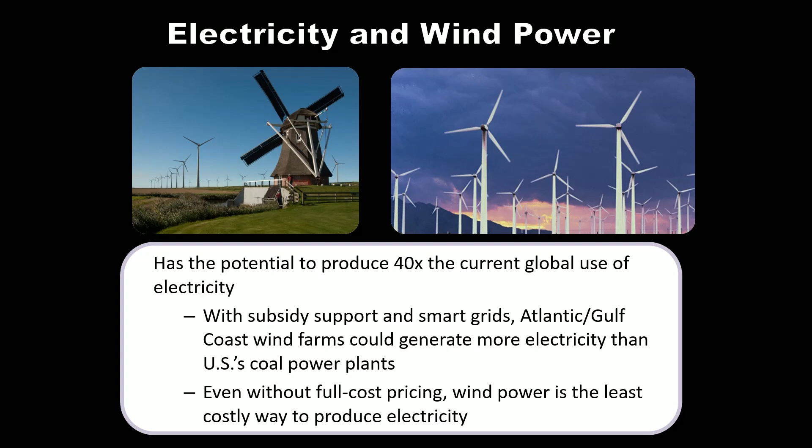Wind power relies on turbines. If during the first video where I was talking about electrical induction you were only half paying attention, maybe it's a good time to go back and check it out, where you have a coil of wire in a magnetic field. Anything that can spin that coil will generate an electric current. And what's going to spin that coil here is the wind. We're going to get the power from the windmill blades.

And the fact that you have this big wheel attached to the smaller wheel means that for every partial turn of the windmill blades, you get a full turn of the smaller wheel, right? Every time this big wheel takes one big turn, you're going to get several spins of that smaller wheel. As a result, as the windmill blades are spinning, the generator is going to be turning many, many times faster. You're going to get a lot of electric current even though the windmill blades are only moving so fast.

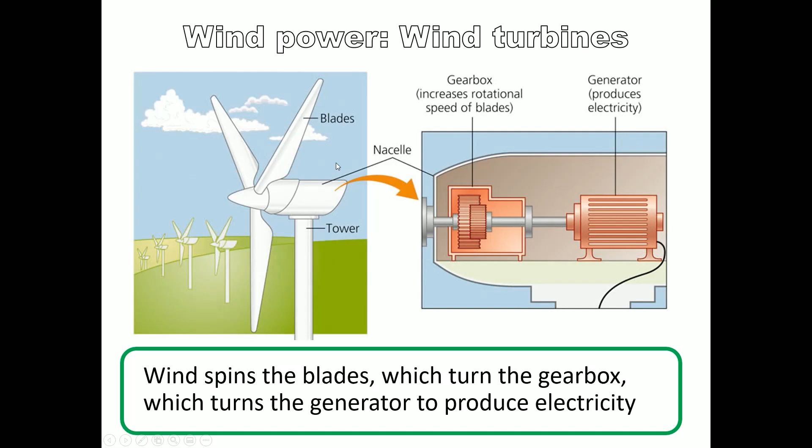Generating capacity, which is more than any other renewable source, and they are also the fastest growing renewable. Solar's fast, but wind is fastest. Now, like a lot of the statistics in my slides, this one is a couple of years old, not that old, just a couple. Of the 200 gigawatts of electrical generating capacity that the United States has added since 2007, 1/3 of that capacity came from wind farms. So when I say it's a fast-growing energy sector, it is really fast. This is one of the largest growing energy sectors that we have.

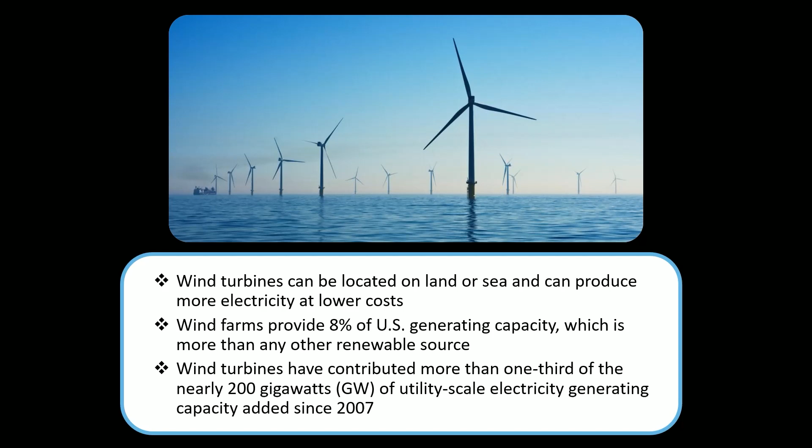And just like with nuclear and solar, where I was talking about new technologies that could improve it in the future, there's some new ideas that could make wind turbines even more efficient. So this gentleman right here is a marine biologist by the name of Frank Fish. That's right, he's a marine biologist, but he is called Fish. And he teaches at West Chester University, actually. He was my zoology professor. And he developed a kind of windmill blade that has these tubercles on it. He based it on a whale's flipper.

He had studied the hydrodynamics of how whales swim through the water, and he realized that these tubercles reduce drag as the whale is moving through the water. And he thought, hey, wouldn't that be a cool thing to adapt onto a windmill blade? So he tried it, and it made the windmills way more efficient. So you get similar energy outputs with these windmill blades at 10 miles an hour as a conventional windmill blade would get at 17 miles an hour. So not only is it a cheap form of energy and a fast-growing form of energy and able to deliver a lot of power for us, but the technology is still developing. It could get even better from here.

This is a field called biomimetics, where we take ideas from nature and we apply them to technology in order to improve it. And if you ever get into design and engineering, you might be shocked how much biomimetics comes into play.

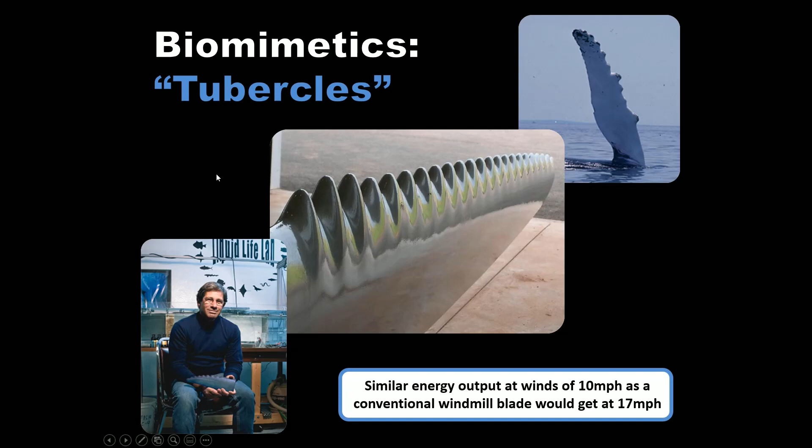Now, every energy type has pros and cons, so what are the cons of wind power? Well, wind farms do require a large area, and it kind of needs to be cleared out in order to install all these windmills there. So that leads to habitat destruction, modification, and fragmentation. However, with windmills, after they're established, you can use the space underneath them for farmland or just let it kind of regrow as habitat, as a large field. With solar, you can't use the land underneath the solar panels for farmland because the solar panels are competing for sunlight, but with wind, you can. Right? So you can utilize that space for different reasons.

Sometimes flocks of birds fly through windmill farms, and several 100,000 birds are killed annually in the US, somewhere between 140,000 to 328,000. That statistic was from an academic review article published in 2013. The link to the source is there in the slides, if you are interested and want to check that out.

Now, for context, oil fields, because you always have to compare these forms of energy to each other, kill 500,000 to 1 million birds annually. So windmills are not even the biggest killer of birds in the energy production industry. Devil's advocate, that's somewhere around 3 or 4 times the number of birds. Oil produces somewhere around 4 times the amount of energy, so per kilowatt hour, they're maybe about equal.

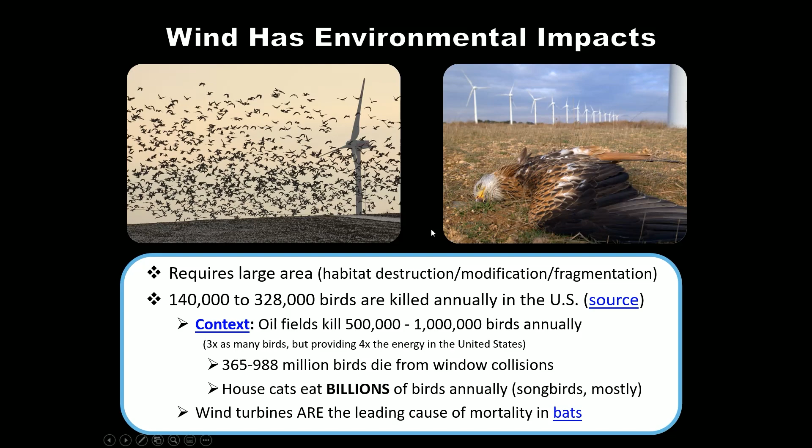So, solar, as we've noted, has an energy storage problem. Wind also, to a lesser degree, has an energy storage problem because the wind's not always blowing, so it would also be handy to have a way to bank excess electricity for later when the wind's a little bit lower. You could charge up an old-fashioned battery, but that requires acids and sometimes toxic metals and mining materials out of the ground. So hydrogen fuel cells are a different kind of energy storage solution to a more traditional kind of battery.

Hydrogen is just one proton, one positively charged particle in the center, and one electron, one negatively charged particle around the outside. It is the simplest and most abundant element in the universe. Most matter in the universe is hydrogen. Okay, so we're never going to run out of this stuff. This is a resource that is amply abundant. And one reservoir of hydrogen that we have amply available to us is water, which covers 75% of the Earth's surface.

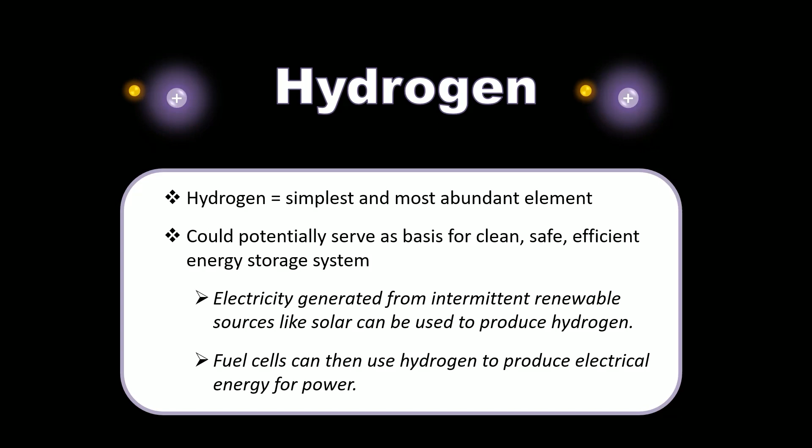So if we create a lot of electricity using some of these intermittent fuel sources, solar and wind. Intermittent means that sometimes you have them, sometimes you don't. And obviously you could use any other kind of electricity as well, but I'm just going to use renewables in this example. You could do what's called electrolysis. And electrolysis means that you're running an electric current through water molecules. A water molecule is a single oxygen atom attached to two hydrogen atoms. That's why it's H2O for water. Two hydrogens, one oxygen.

So if we get two water molecules, we run electricity through it. What it does is it splits all of those atoms apart from each other, and they will reform in different combinations. So you'll end up getting hydrogen gas. So now we have elemental hydrogen here, and we have oxygen gas. Okay, so these are the byproducts of electrolysis right here, just hydrogen gas and oxygen gas. No carbon dioxide, no methane, nothing like that. We started with water, we end with hydrogen and oxygen.

Now, if you were to mix the hydrogen and the oxygen together, you could ignite that and get a combustion reaction. You would get a little explosion, and you could design an engine that runs on just that, right? That splits water molecules into hydrogen and oxygen, then recombines them together, has something like a spark plug to ignite them, and then you have a combustion engine that basically runs on water. These cars have been designed.

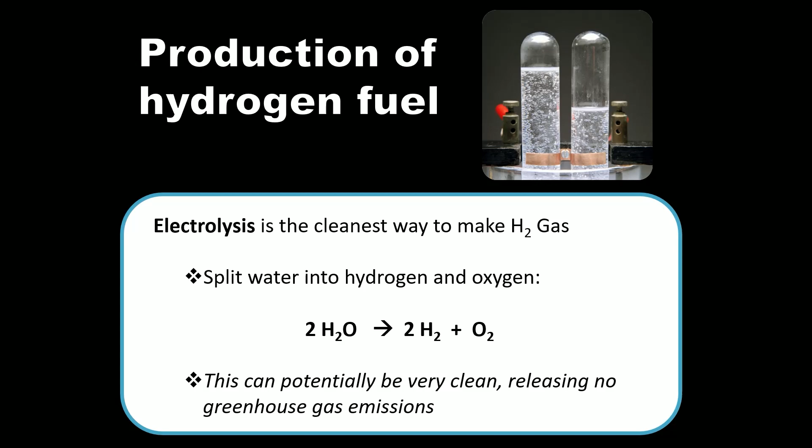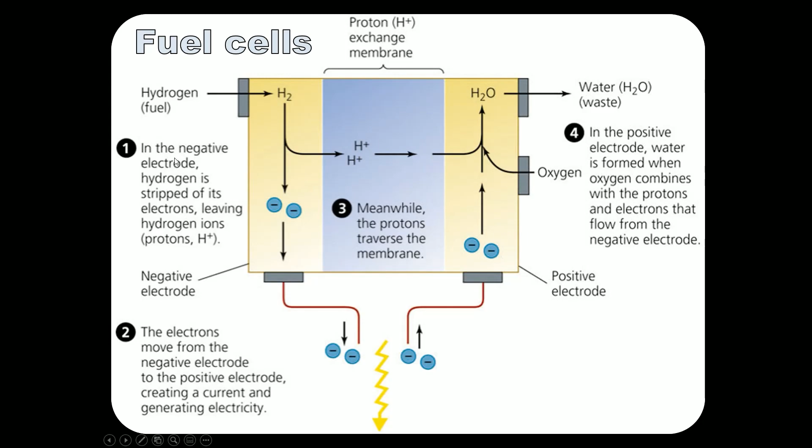Okay. So that's, like I said, pretty much the easiest chemistry you can imagine. If you understand that each hydrogen atom is one proton, one electron, and you understand that the protons can move through the membrane, the electrons can move through the wires, then you pretty much understand how this fuel cell works. The other thing to know is that when these two combine with oxygen, then you're going to get water coming out, H2O.

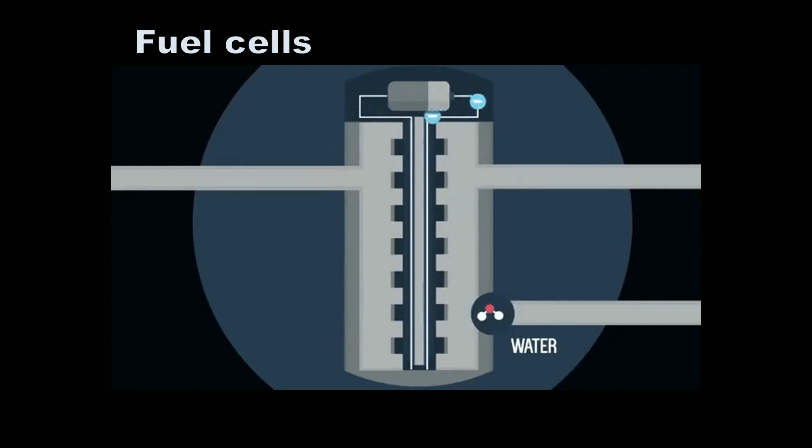I have this animation here of a fuel cell. It's okay. It shows hydrogen and oxygen going into their respective chambers. The hydrogen is stripped of its electrons. The electrons move through the wires. Then you see the hydrogen and the oxygen come together to form water. The only thing I don't like about it is that the electrons kind of lag behind, and the hydrogen and the oxygen cannot bind together to form water without those electrons coming along as well. So the electrons should be moving just a little bit faster so they can jump onto this water molecule at the same time. Otherwise, this is a pretty good idea of how it works.